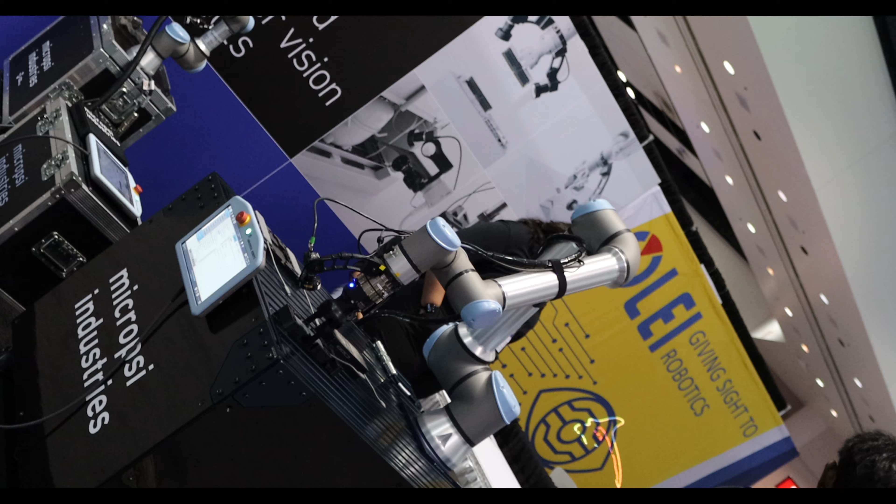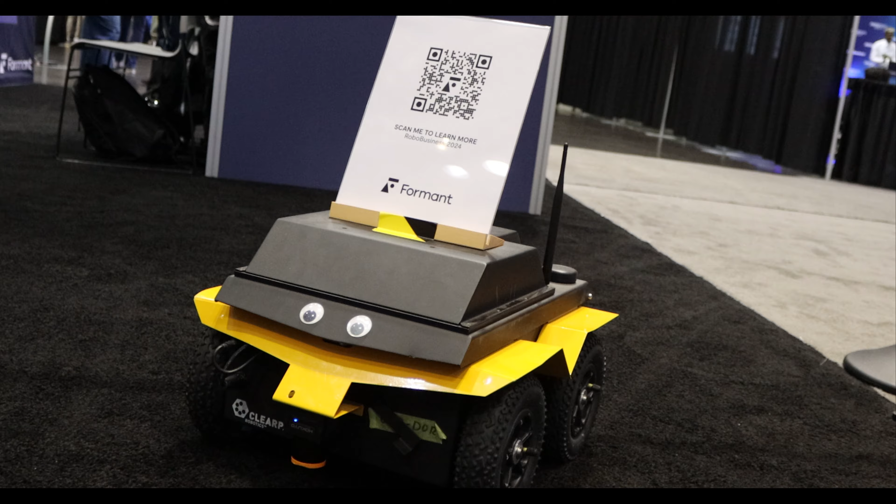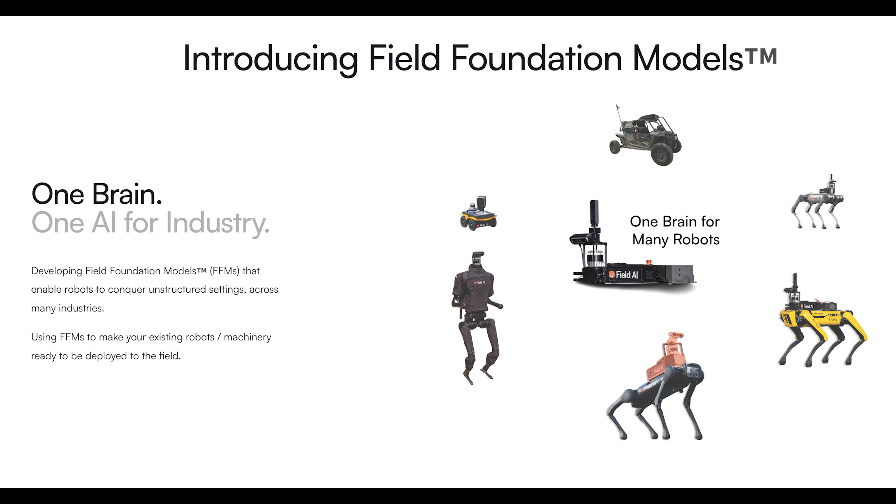So we are Field AI, and we're here at RoboBusiness 2024 showcasing our embodied AI autonomy software, which integrates onto any type of mobile robot and turns it into a fully autonomous vehicle. Our AI stack can turn normal mobile robots of any kind, a quadruped, a humanoid, a drone, a wheeled vehicle, and enable it to operate fully autonomously in unmanned and unknown environments with no GPS, no pre-planned trajectories, or any type of pre-mapping that needs to be done for the robot to navigate that environment.

Our AI software enables that autonomy and allows the robot to be deployed more quickly and scaled more quickly than ever before. It can work at a variety of inspection tasks through construction, oil and gas, mining, really any environment that is unknown and highly dynamic, that challenges traditionally programmed robots to deploy in. Our robot overcomes all of those limitations and allows customers to finally utilize robots the way they were always intended to be used.

Hello, I'm with THK. You see our booth here. THK is the largest linear bearing manufacturer in the world. Our linear guides, our ball screws, and our other rotary products. We're here at the Robot Show today, and we do a lot of work with different robotic companies. You'll see our joints and our products go into the robots. We're also very large in aerospace, machine tools, and medical industries. So we're a very large company. Actually, we're the largest bearing manufacturer in the world.

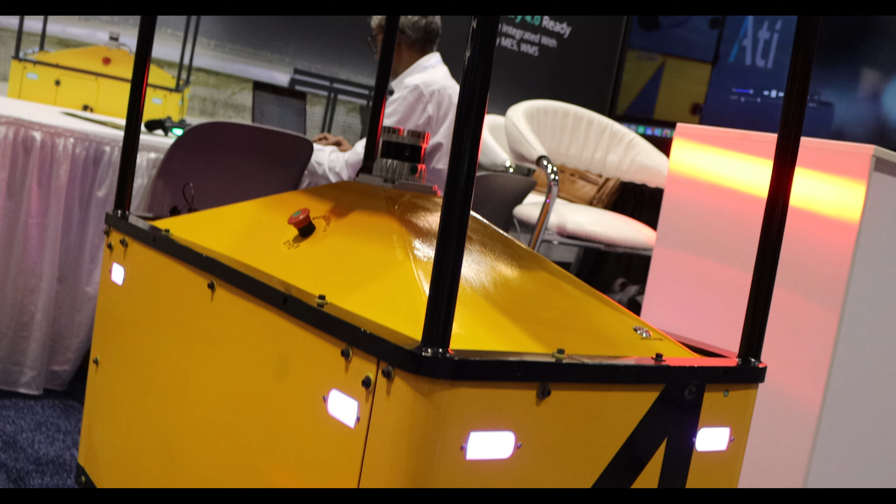Hi, we are Ati Motors. We make AMRs that are autonomous tuggers. This guy here can pull 1 ton. We have a bigger version which can do 3 tons, close to 6,600 pounds. A differentiator for us is that we can do outdoors. We can take on rains, a little bit of snow, ramps, gradients, speed breakers, tough flooring conditions. That's our USP.

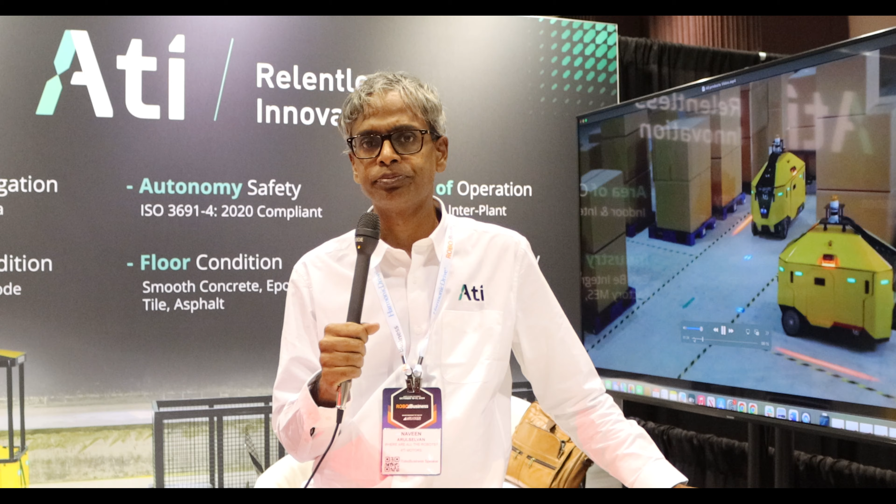What we do, the way we do it, is we use 3D LiDAR technology, so the robot sees the world in 3D and processes in 3D. We have a swappable battery, so the robots never go down. People can swap the battery at the end of the shift. We focus primarily on automotives and factories, manufacturing industries primarily. Our customers include Airbus, Harley Davidson, Valeo, Cummins, Schneider, and so on in the US. We have over 140 robots deployed in 5 countries.

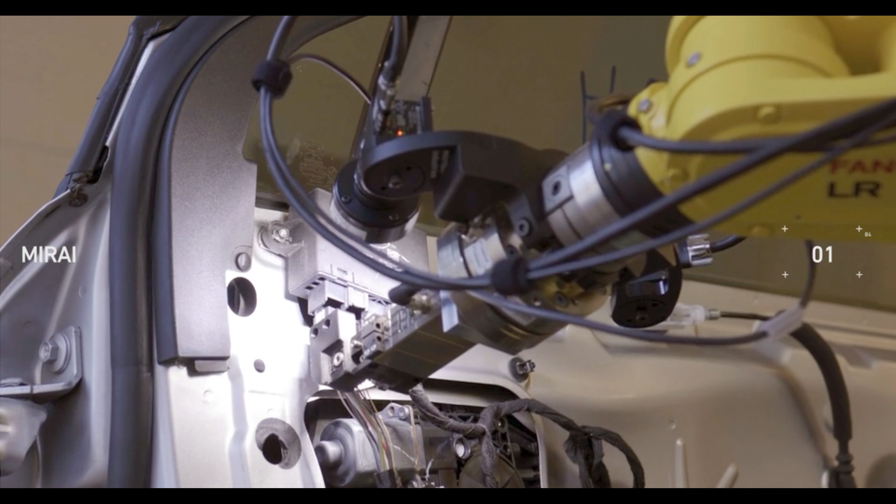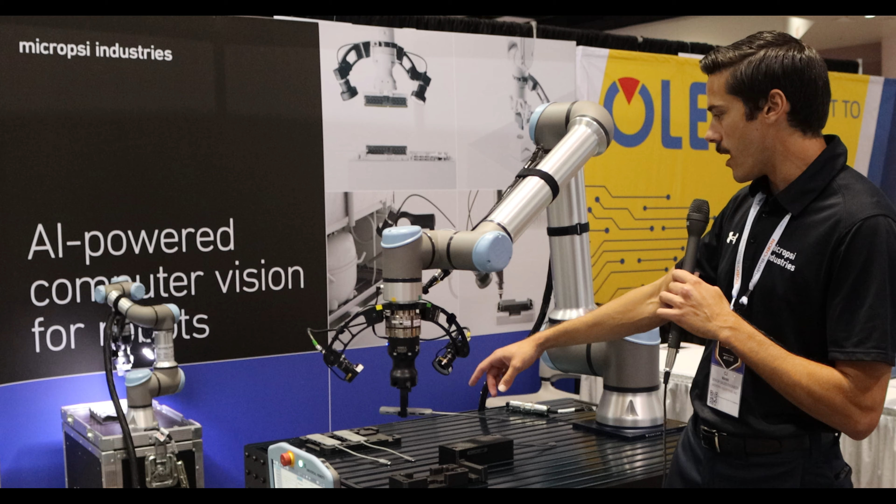Hey, this is CJ from MICROPSI Industries. We have Mirai here, which is our AI-driven software that helps robots handle the last millimeters of motion when parts aren't perfectly fixtured. So we've got an application here showing parts that aren't perfectly aligned inside of this fixture. The AI vision system is able to align the gripper fingers to that and then align itself with the cable here as well.

It's moving at 15 frames a second, so you're actually getting real-time feedback for the gripper fingers, and then it's able to understand how it's gripped the part and align itself to the port as well. So a lot of different types of applications in the electronics manufacturing space, dealing with cables and wires, and really anything where a robot needs help placing its end effector in the correct position.

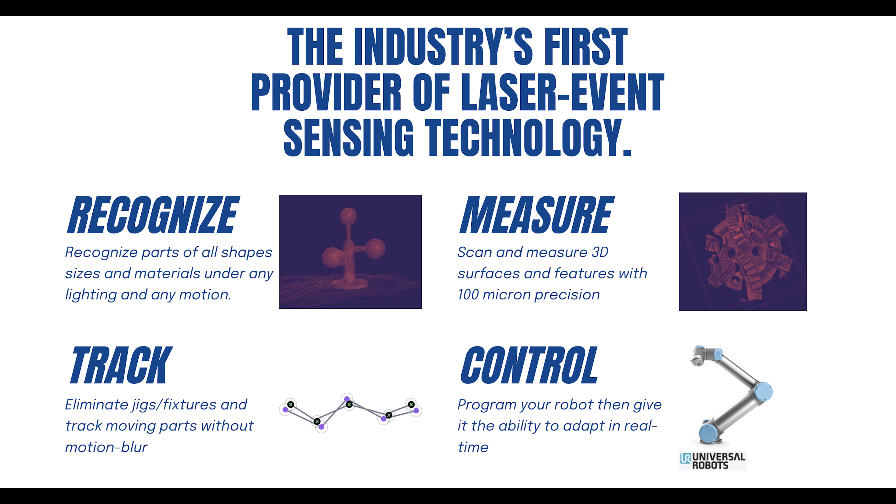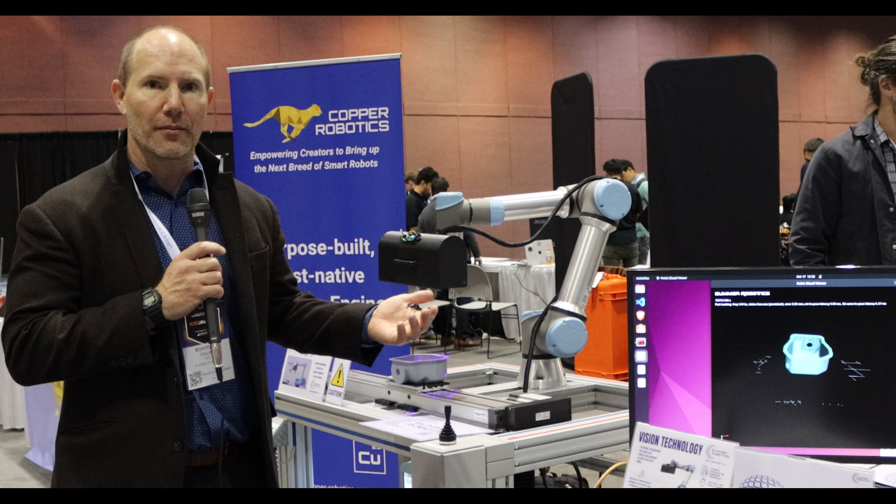Hi, I'm Skylar Cullen, CEO of Summer Robotics. We're developing low-latency robotic vision solutions. Our software is 10x faster at responding to changes in the environment. It allows us to mount our vision solutions on robot arms to perform very important tasks in industrial automation like tool tracking, measurement, grasping. We have many customers coming by asking for applications across the board, whether it's AMRs with arms that need to grab objects off shelves, or companies that want to go into an automotive assembly line and bolt bolts onto vehicles while on the moving assembly line.

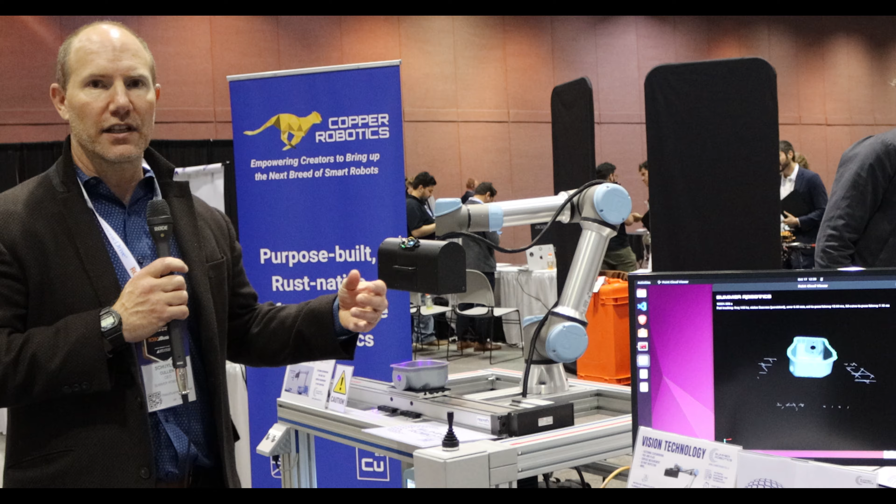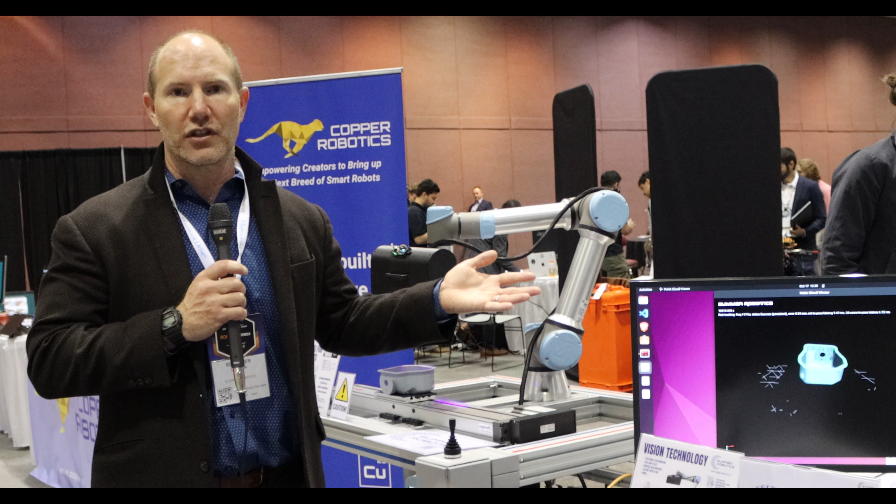The technology is based on novel sensors called event sensors. These act like digital retinas, and then we create a sparse structured signal out of lasers to stimulate these event sensors, and we generate the 3D with just 5 milliseconds delay from when the photon came in. This is, like I said, a 10x improvement over traditional sensors using frame-based processing techniques.